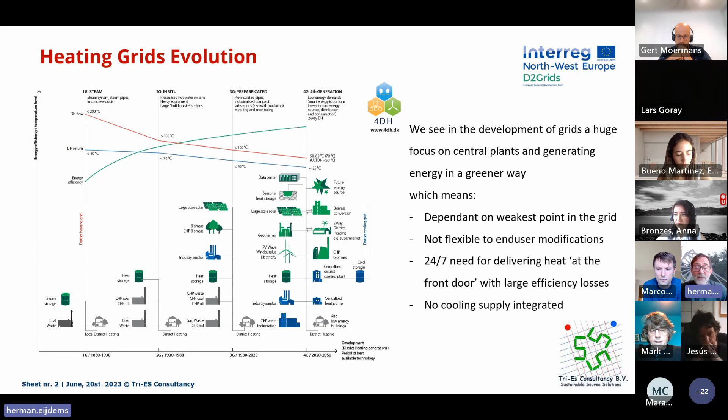But there are also some disadvantages of central systems. One of them is that you are dependent on the weakest point in your grid. So if one building in the city is very badly insulated, you will still have to give these high temperatures. And you cannot adapt to end user modifications, which will happen all the time. Actually, you don't know when they need heat. So you are delivering heat 24/7 at the front door. And if you look at this picture, you see some feature for cooling, but cooling is not integrated in this concept.

As a starting point, we had the grid which was developed in the city of Heerlen, and it looks more or less like this picture. You see that we only use electricity in this grid, which was an advantage because now we want to phase out fossils and natural gas. We had a very big buffer, which was the Mijnwater reservoir, feeding that system on the backbone. And we had two temperatures, 25 degrees Celsius for the warm pipe and 18 for the cold pipe.

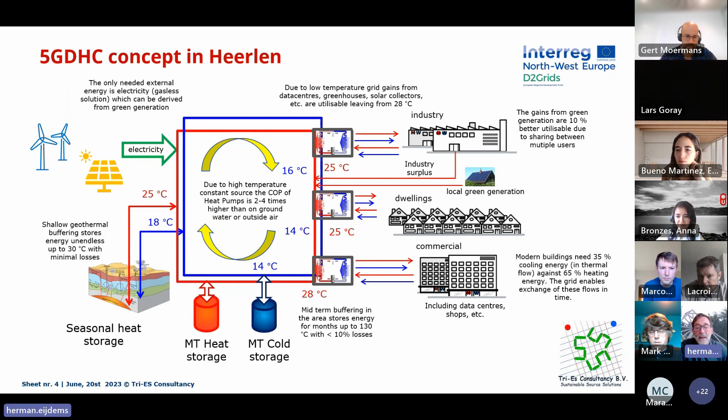And what we see is that we get very good performance of our heat pumps because they have a very powerful source, and they reach high COPs and also low maintenance and high lifetime of operating.

Actually, when we started this project, we thought, must we copy-paste what we built in Heerlen to other locations in Europe? And we said, well, actually not. It's better that we start thinking why we did this thing in Heerlen this way. And we came up with 5 principles. And these principles are ideals. None of them you will reach for 100%, but you are working towards it and nobody is against it. That's the nice thing.

So the first point is to close the energy loop, and that's actually what I said. Don't blow away heat or cold from your roof, bring it back into the system as much as you can. Use low-grade sources, the second one. So why burn flames of 1000 degrees if we only have to lift that building 10 or 15 degrees in temperature? The third is go decentralized and demand-driven as much as you can.

We see losses of, on average, like 25% on high-temperature heating grids. And in summer it could even go up to 60, 70% for domestic hot water. So you can get quite some nice savings by working decentralized and demand-driven. And then we have 2 more principles which are actually a bit different in character.

If we look at the total energy demand of a country, you see different sectors. And if you can link those sectors, like transport with buildings or agriculture or industry, then there could be big gains. So we want to approach this energy question for buildings also from the bigger picture of integrating energy flows which are coming into a city or into a built area.

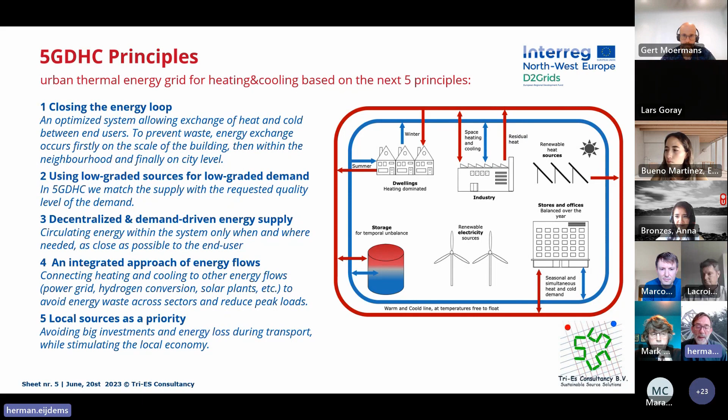And then as last, we hear a lot about windmills on the North Sea and maybe PV panels in the Sahara. That's fine, we might need them, but start looking in your backyard at what kind of energy you have in your local area, and then if you need more, you can always go further and take it from further away.

From those principles, we have been thinking, well, first what you need to do, and that could be an important thing, you have to fix your system boundary. So if you want to quantify how good you are doing on those principles, then you must know what you are looking at and where you can get easy data, because that's also a point. Energy can get very complex, but if you have a good system boundary, data could be easy to get.

And then we had a session and we tried to bring these principles into formulas so that we can formulate KPIs and put a number on how good you are performing. Actually, you could go further and put a weight factor on it and even put a 5G label on that. There are 2 reasons to do that. The one is that the label could be an assurance for quality. So you don't have to check every different point in the system to see if it's well done, but the label will ensure that you get a good performance based on 5th generation thinking.

But the other thing, and that's in the left corner down, actually what you want to do is find out from these kinds of measurements what are good measures to improve the system. So should I add storage or should I add solar panels, and what kind of actions would improve your system and bring it closer to those principles.

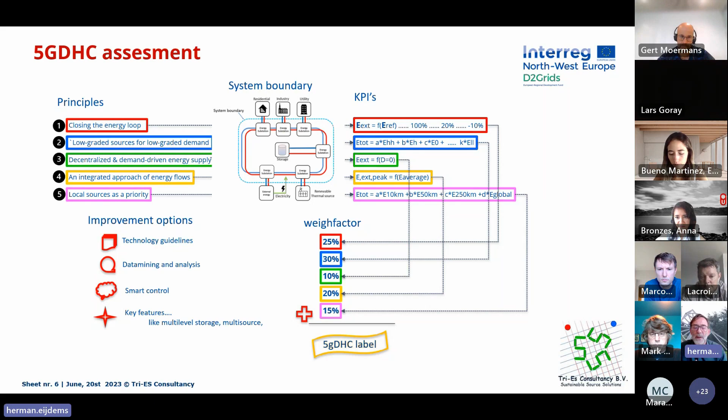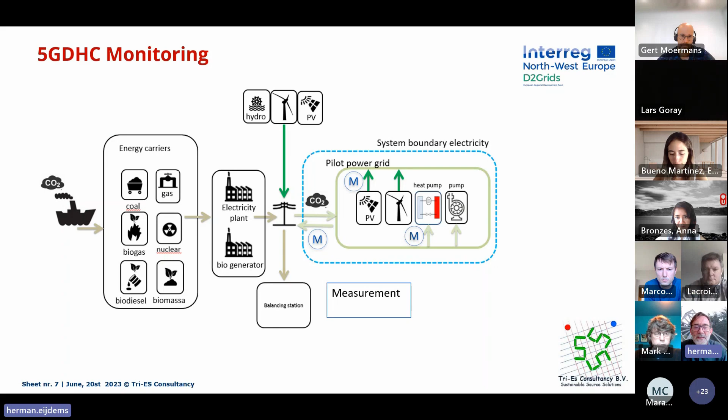Of course, monitoring, and that's also very connected to the system boundary. And then I get back to some of the benefits of this fifth generation.

So if you have decentralized installations, you will get the opportunity to connect when the building is ready. So even in the building process, you build up those systems bottom up. If you have connections like 100,000 square meters of buildings, you can start the system and then you can grow from bottom up. And actually, you don't need 10,000 end consumers before you start it, and you will get your money quicker if you start small.

There can be substantial heat gains achieved from those low temperature sources. We know that we have about 3 times the amount of what buildings need, which is wasted as waste energy, just dumped into the air or in the water. And of course, cooling integrated in this system.

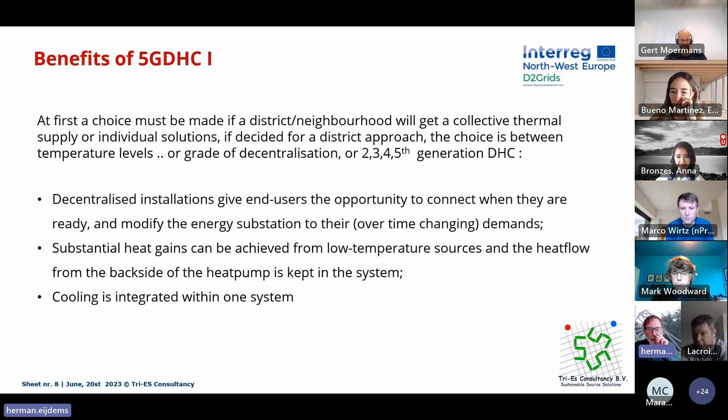Then I have a number of benefits, and this comes from scientific papers, and they are confirming that those systems, if you go to 5G, have much better performance, even in regard to shifting from third to fourth generation. So we see that you could reduce the amount of electric energy by like 40%. If you go from 3 to 4, you find savings of 5%. But if you go to fifth generation, those savings could be 42 to 56% on carbon and on costs.

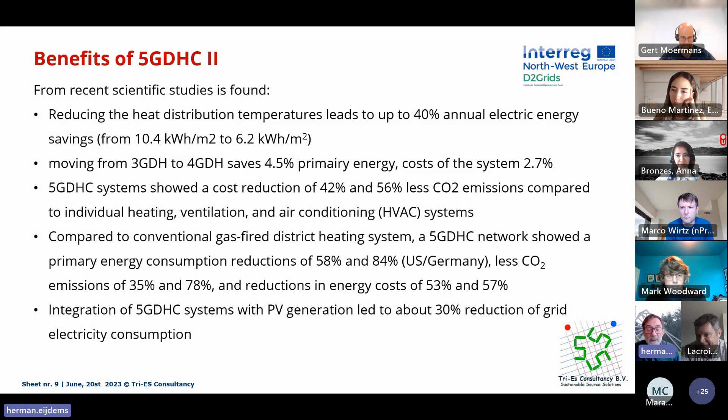Actually, we do have a number now. A lot of papers are coming up, and I think one of those things in the Industrial Alliance could be that we make a library where you find these kinds of scientific studies and papers showing you these results and showing you good examples.

Also, there are some barriers that we are facing, and I think one of the most important barriers is how can we speed up the process. It's a very long process, and if we want to get somewhere in 2050, one of the main things is that we look into ways how we can speed up, and certain things there also have to do with this alliance: that you go into standardization, industrialization, plug and play solutions, and foolproof solutions, which all speed up the process. And avoid hindrance as much as you can, because it will give you resistance.

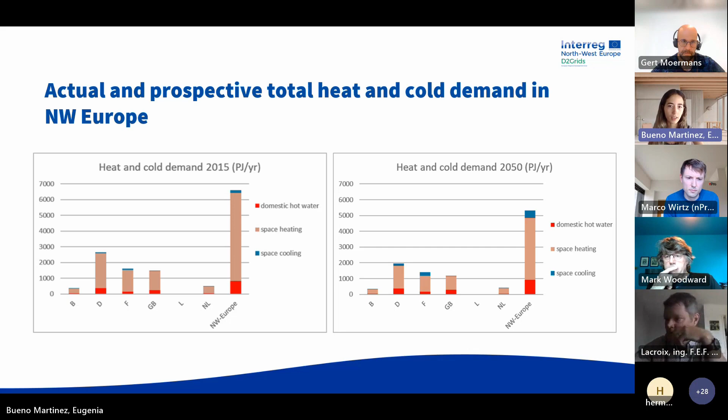For this, we looked at existing studies in Europe, including other outlooks, for example from Heat Roadmap Europe, which is also a European project. This shows that in the future we will still have a lot of heating demand and actually increasing cooling demand - not a lot, but increasing. And when you look at how this heating demand is now supplied, you see that district heating is only around 10% of the total supply in Northwest Europe. Natural gas is the most used, there is also oil and electric, biofuel and other, but district heating is quite a low percentage still.

And in the future we do expect it to rise. So to do this study, we looked at 3 different options to increase the 5G DHC market potential. First, the conversion of existing traditional district heating, so 3G and 4G, third and fourth generation, to transform those existing ones to 5G. Then we also looked at third and fourth generation systems that are not in place but are expected to be built in the next years, and instead building them as 5G. And the last option would be systems that are not expected to be built as fourth or third generation or any traditional district heating generation, and also not existing ones, but ones that will be planned from the beginning to be built as 5G directly.

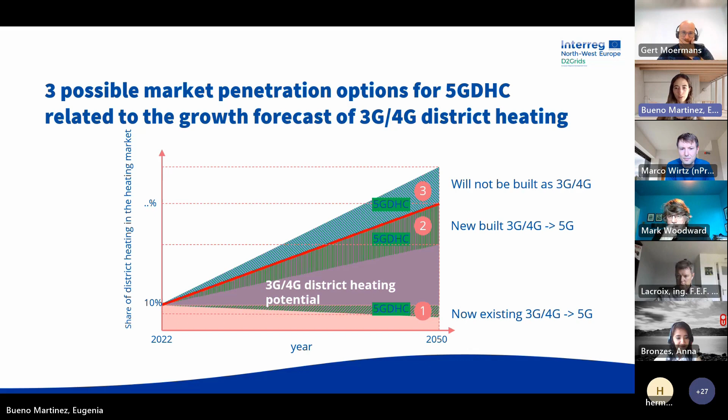So with these 3 options, the question was what would be the percentage of these different alternatives. And for that, we had an expert group at the D2Grids project, composed of several partners who work with district heating and have also been working for several years with 5th generation district heating. These are the percentages that came out of that study.

And finally, these are the results. So the share of 5th generation district heating and cooling in the district heating market would be around 40% by 2050, and in the total heating market it would be only around 15%. So this might not seem a very optimistic potential market, but do take into account that this is from the total heating market, so it's still quite a lot of investment and quite a lot of opportunities.

And we also took a more conservative approach - a more toned down, realistic, moderate and safe view for this study, for these projections.

So actually, I wanted to end this by opening a little discussion here, because we made a relatively safe estimation for this, and we wanted to know what you people from the industry actually think of this percentage. 15% by 2050 - is it low, but a safe assumption? We wanted to know what you objectively think. Also, we do think it could be higher, but there needs to be more work done. That's why we created this alliance, to bring together industry and also bring attention to policymakers about this technology. That's why we are establishing this alliance, and why we want you to give us your opinion and your view on this.

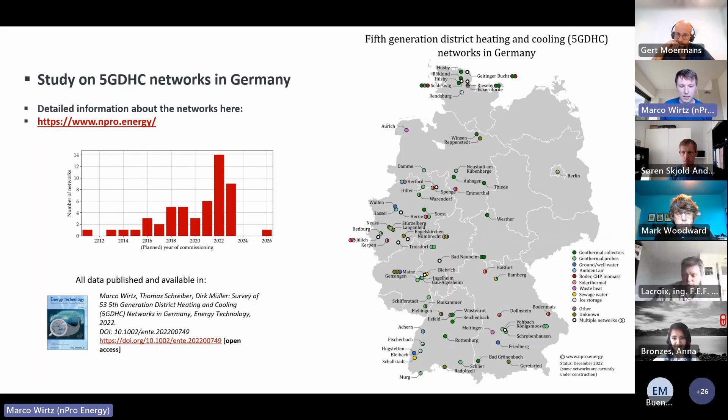If you want to go into the details, you'll find a lot of information on our website, npro.energy, with all the data and some nice figures. Have a look if you're interested.

The next thing - I just want to show you our tool. It's also accessible via our website, npro.energy. There you find the official version we offer right now as our product, but of course we are developing it further. Today I want to show you a preview of the next version, because we have many new features, especially for 5th generation district heating and cooling networks integrated into the tool, with still more new features coming in the next weeks and months before we officially launch the software.

I'll just try to share my web browser now. It's a web application, so there's no installation required, which should make it easy. That's the main focus - it should be easy to use for people to plan their district. You have a couple of options on the main page. When you create a project, you can say, okay, we want to design a district energy system, but you could also design a single building - that's new in this version.

Then you can choose from different energy supply concepts, like a pre-selection - maybe a 4th generation heat network, maybe a 5th generation heat network, but it's also often relevant to compare with a decentral solution: what happens if we don't have a heat network and instead want to compare with air source or ground source heat pumps in every building. I just want to show the 5th generation heat network.

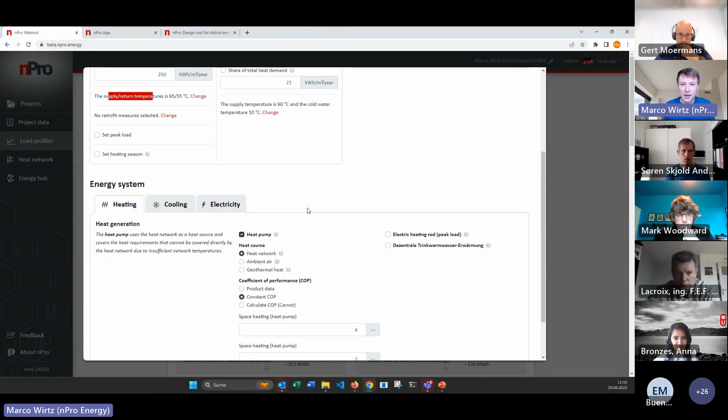Process cooling, like for a supermarket, and also the electricity with e-mobility and electricity demands in general. If we go into the fifth generation world, of course, we not only have demands, we also have a building energy system that we need to define.

So we need to define, okay, which heat pump do we use in the building? And we can have a very rough estimation, like with a COP, a constant number, but we can also go into the details and actually define our own heat pump with the data sheets that we have from the manufacturer, and go into the details if we want to do that.

So that's like the buildings that we have to add to the district, and then we get already some preliminary results, like what's the electricity demand for the decentral heat pumps, what's the waste heat recovery inside the buildings and between the buildings. So all these kinds of KPIs.

And then on the next page, that's about the heat network itself. So we have to define what are the network temperatures. For fifth generation, for example, approximately like 10 degrees, 2 degrees Celsius in the supply and return pipe, but we can be free to define this.

And then we can also go into the details about the network sections. So we can define different branches and sections of the network, and then have a look at what are the heat losses, for example, in the network. But of course, you see the minus here - so for fifth generation, we also have heat gains if we have a plastic pipe, for example. That's the heat network section.

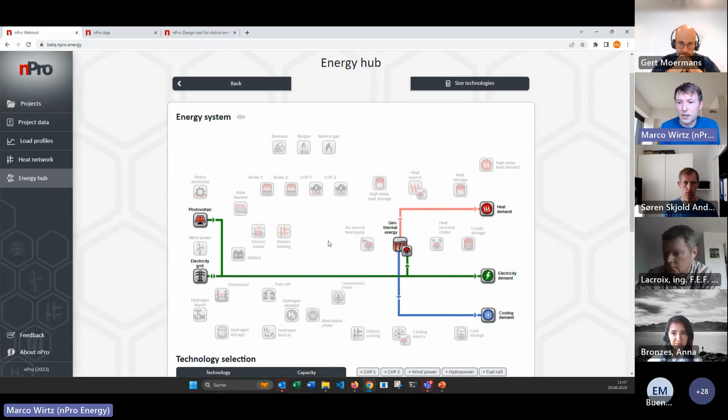And then on the last page, we come to the Energy Hub page. So how do we actually supply the heat network? We have many different options. We will add also a few more in the next version.

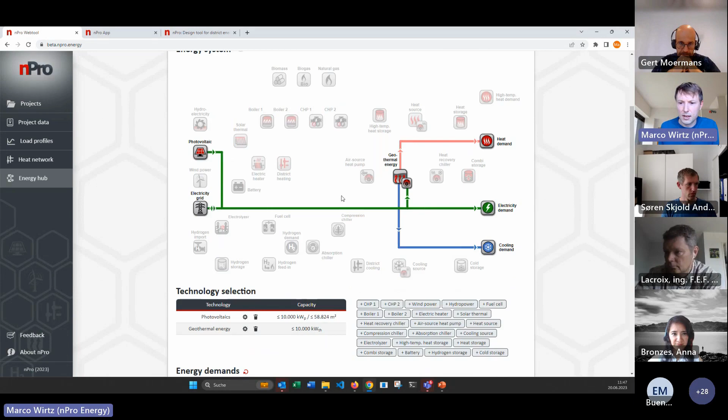So we have geothermal energy, of course. We have an air source heat pump that we can use, solar thermal, the normal conventional generation units, but also something like a heat source that can be waste heat or something similar. And then we can also set the parameters, of course.

I don't have the time to show this, but then you will say, okay, size technologies, and then you get an estimation - what's the optimal configuration, like how much photovoltaic should we install that matches with the geothermal energy, for example? And this, of course, the result here depends on the electricity supply price, on the feed-in tariff, on the load profiles, and so on. This is all part of the optimization model.

And actually, this was things that I also did in my PhD in Aachen University. When we have the design, like the pre-selection for the design, then we can go one step further and simulate the system. So we get results really on an hourly basis - when are the technologies operated, what are the energy flows, and so on.

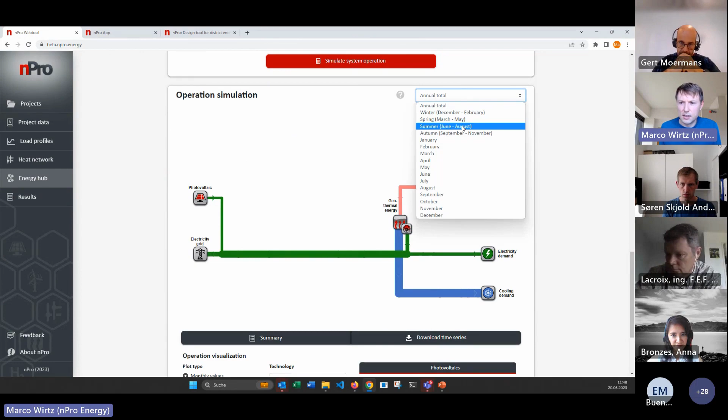And then you get some visualizations about the total energy here on an annual basis, or also how does it look like in summer. So you can visualize all kinds of energy flows and create your own plots also to investigate, okay, where's the energy coming from? How much do we put in the battery? Maybe how's the system operated?

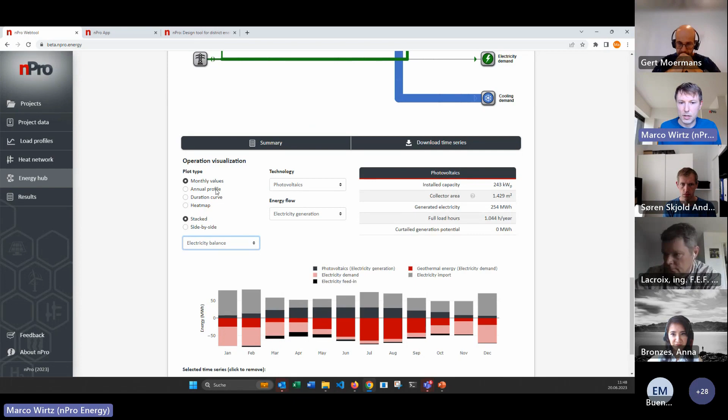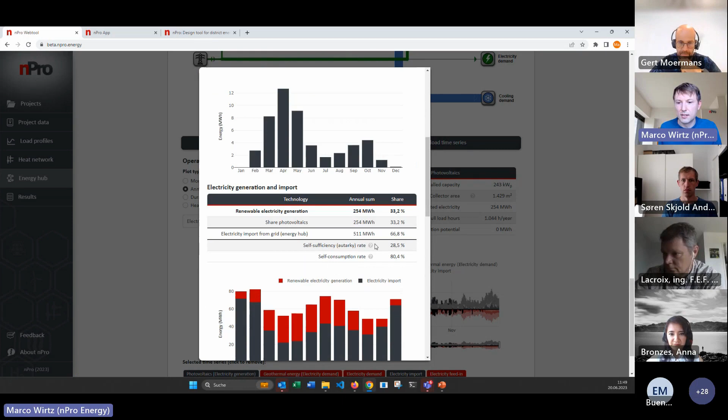You get a summary with all kinds of KPIs. So the most important ones for someone who is planning a district with fifth generation, like what's the share of photovoltaic, what's the self-sufficiency rate, how much electricity do we need to import, and so on and so on.

There's also an option to go into the details. You can download all the time series of the technologies as an Excel file and make your own analysis if you want to. And then there's one further page.

You can go to the result page then and see the economic results. So how does the district perform in an economic perspective? Taking into account the decentral heat pumps, the network itself, what are the costs for the heat network, and what is the cost for the electricity price, and so on and so on, and see what's the economic situation for this setup.

And I have a few minutes left, so I can show you a new feature that we also recently integrated. So we can do a scenario comparison and see what happens if we exchange now the fifth generation heat network with a fourth generation heat network. And I just rename it here. So let's say we want to have a normal heat network as a comparison.

Then we could also change the buildings, but I'd leave it for now. And then we change the temperatures and say now it's 70 degrees Celsius in the supply pipe, for example. And the software then will directly recognize, okay, now I don't need the decentral heat pumps anymore. I can just go with the direct heating of the building. And I will change the plastic pipe here, otherwise we have a lot of losses.

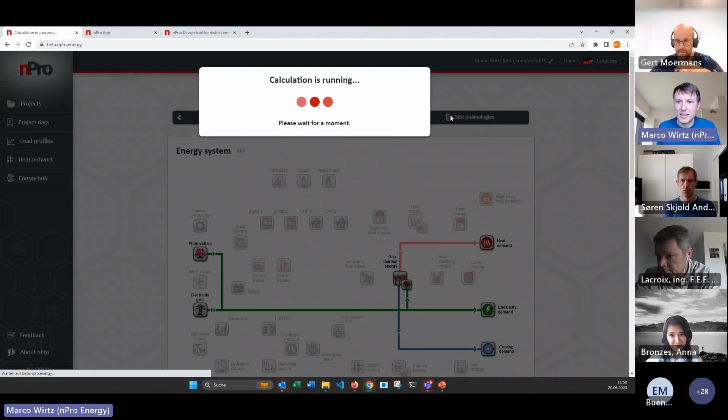And then go to the energy hub, and then we can just recalculate it again and have a new design. So the PV capacity might change if we have slightly different load profiles due to the heat losses, for example. And then we can simulate the system again and then go to the result page and then compare really directly, okay, what's going on with the fourth generation, what's going on with the fifth generation. So I will just load the scenario. So scenario 1 will be the fifth generation, and scenario 2 the fourth generation.

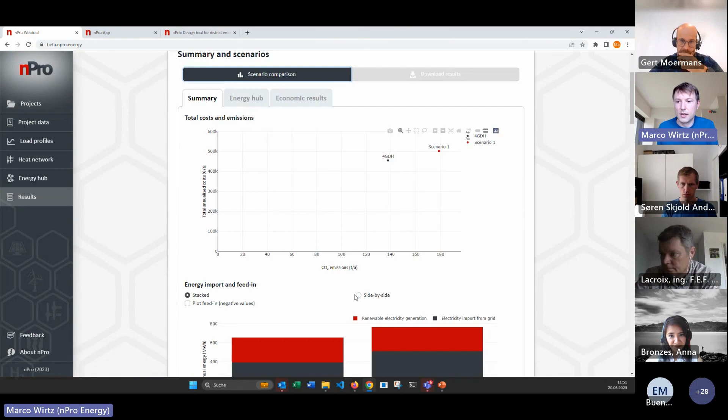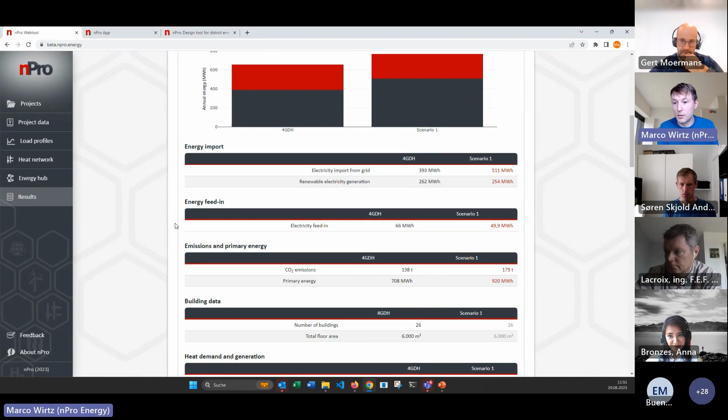And here we see an overview like the costs of the fourth generation and the fifth generations, the emissions, and so on. Of course, this all depends on the parameters that you set in the cost parameters, especially that you set in the settings. But then you get an overview, okay, how are the different systems performing? And you could analyze, for example, what happens if I integrate a storage? How does the efficiency of the system change? All right, so that was what I wanted to show.

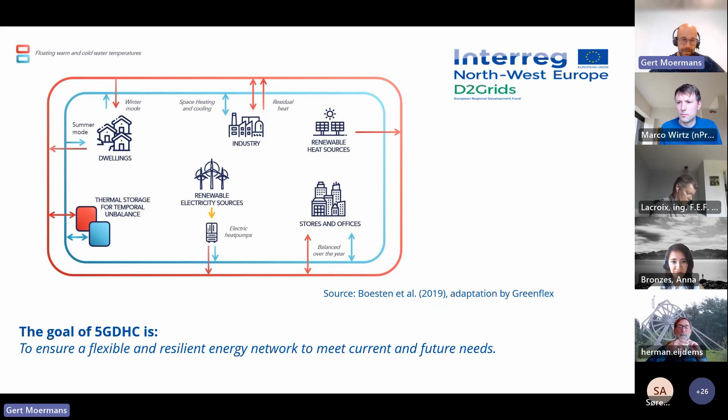Let me just begin with a rough schematic of what the 5th generation network looks like. So we have some technical components. We have the network itself, we have the connections to the buildings, we have our different sources. So a lot of technologies, existing and upcoming, are integrated in this full 5G DHC design. And we try to make an inventory of what exists, what's upcoming, and maybe we can all benefit from this.

It was already touched upon briefly, but we have 5 core principles of this 5G DHC developed within the D2Grids project. I don't think I say something new when we say we try to close the energy loop, and we try to use low-grade sources as much as possible. It's decentralized, as Herman already indicated in his presentation, we try to integrate the energy flows of different types, and we prefer to use local sources.

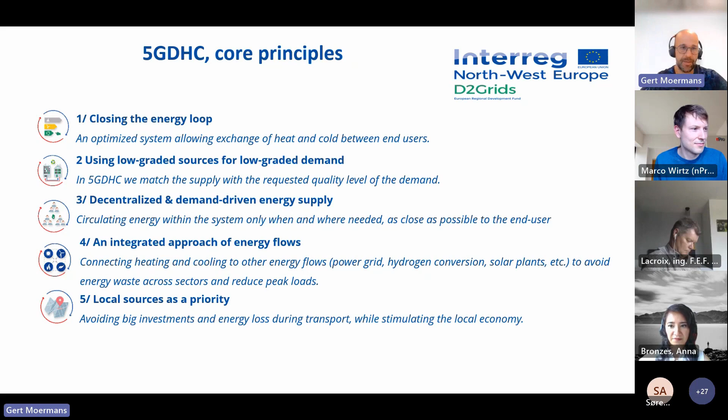So for now, when we set up a project on developing a new district heating and cooling network, I think this is good practice. We have a feasibility study. When the result of this feasibility study is positive, we make a master study. When this master study is done, or maybe already within it, we try to mobilize local stakeholders, have some background on funding, and make people aware of this network being installed. Then when funding is there and the environment is good, we have detailed studies, so technologies are being worked out.

And for now, we have very specific solutions for every project. So every project is tailor-made, which makes it quite expensive to develop projects, as some things will be done repeatedly, and maybe that's an idea to align forces there. The idea behind inventorizing these technologies is that maybe we can align our products.

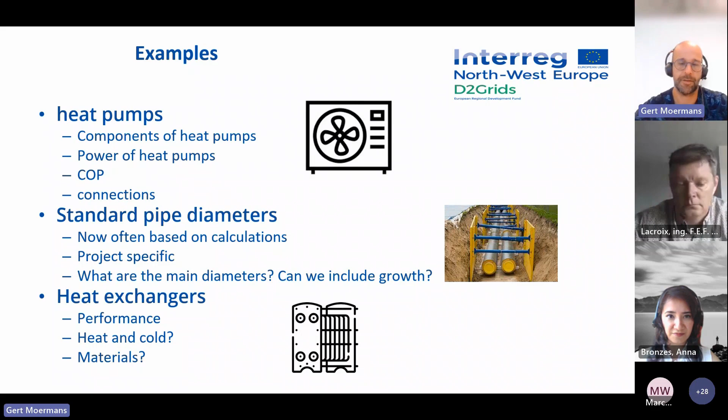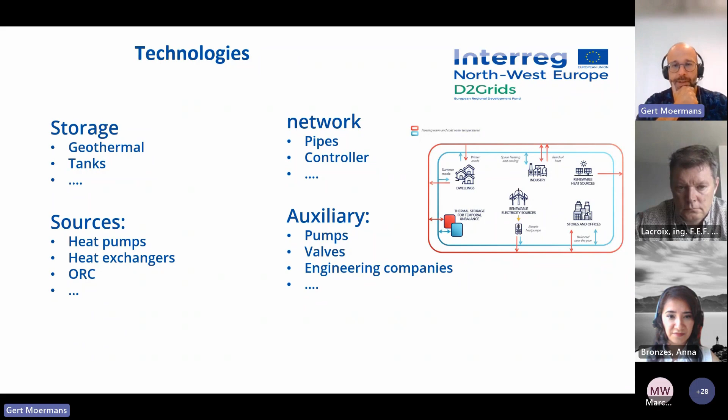In the schematic that I showed in the beginning of my presentation, as I indicated already, there are a lot of technologies involved. We have technologies for storage, for the network, for the sources, but also some auxiliary types of technologies. And it would be great if we could collect them somehow, and we have tried to do a first exercise in this best available technology catalog.

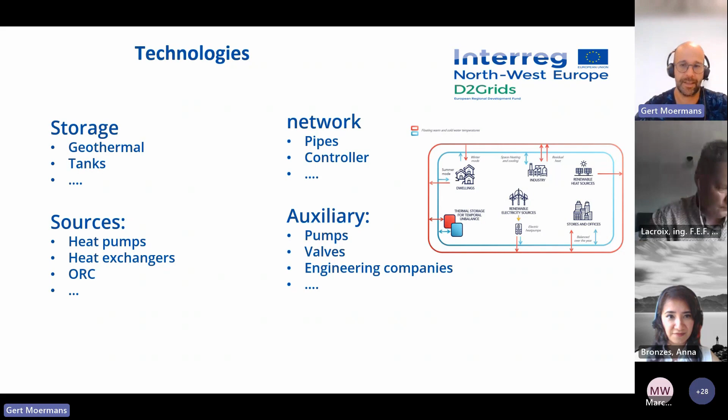So what do we want this catalog to contain? Mainly all interesting technologies that preferably match with our 5G DHC and which are already quite far in development, so not really in the R&D stage, but implemented, for example, in a first project.

So they have a TRL level of 7 up until 9. A first step that we took in the D2Grids project is that we set some technical parameters. But before I give an insight on how we set these parameters, let me first say that these are not limitative parameters. We only want to indicate that it might be good to look at some technical parameters to indicate how well they perform within a 5G environment.

So we looked at several types of pumps, heat exchangers, and we tried the geothermal. The list is there, so you can look at the technology list. So we try to have some indications of parameters where we can indicate these thresholds are good practice for 5G DHC or not. As I said before, it's indicative, so it's not limitative.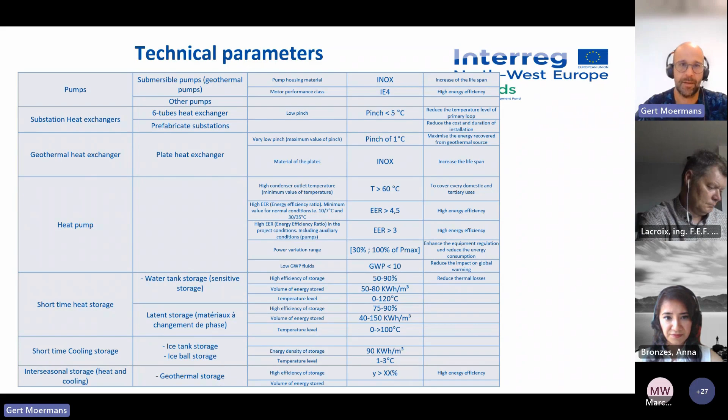With these parameters, we then contacted within D2Grids our 5 pilot sites, so maybe it's good to mention them as well. They were distributed in Northwest Europe. We have a pilot site at Paris-Saclay. We have one close to the Mijnwater project in Heerlen, in a city called Brunssum. Then there's one in Germany in Bochum, and 2 in the UK, one in Glasgow and one in Plymouth. So we've collected information from them.

So what technologies are implemented in these pilots, and these are already now in our overview. And we try to now approach the industry for other solutions which are not in the pilots. And then I think the best part will be to share information on this existing technology so other people who try to start up a new network can have an insight on these best available technologies, let's say.

So we sent out a questionnaire to the pilots, where we ask specifically for their geothermal solution, piping, substation, storage, electricity. Maybe they have some control algorithms installed. And then we collected information on who was the contractor, who was selected. Can we have a contact person, a name, telephone number, email, and so on? And then which of the products of the manufacturer was selected, and some technical parameters.